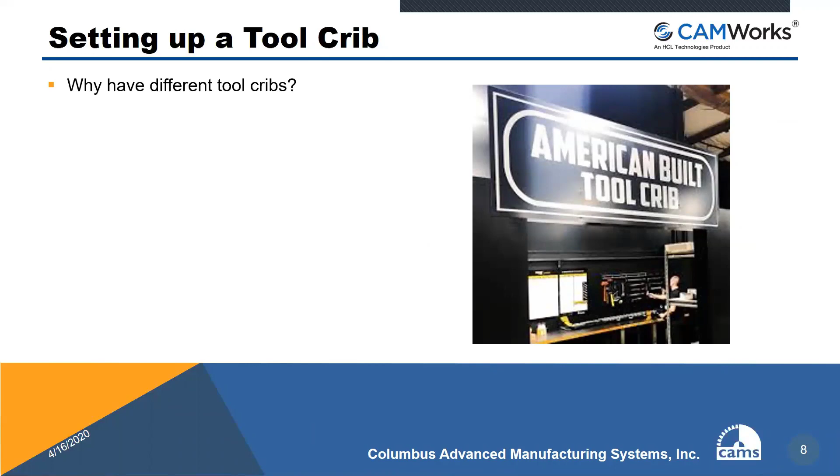So, all right, first things first, setting up a tool crib. This is important. Why would I want a different tool crib? For instance, different machines and materials. If you machine plastics and tool steel, you're going to use different tools. You don't want to machine tool steel with necessarily the things you would machine plastic with. So setting up different tool cribs for that is important.

I'm going to flip over to the actual technology database right now. So this is the TechDB. There's a few ways you can get here inside of CAMWorks. There's a button right here, Technology Database. And then you can also go to CAMWorks, I've got 3 different versions on my computer, CAMWorks 2020, scroll down, Technology Database Application. Well, we've already got it open just for speed.

I'm going to go over to my tool cribs over here. This is the default TechDB that comes with CAMWorks when you install it. I'm going to go to Tool Crib 2, which has tools in it already. These are going to be kind of your favorite tools, the ones you're always going to use a lot. But let's say I got a new machine. We've got a Hurco back at the shop, so I'm going to create a Hurco tool crib.

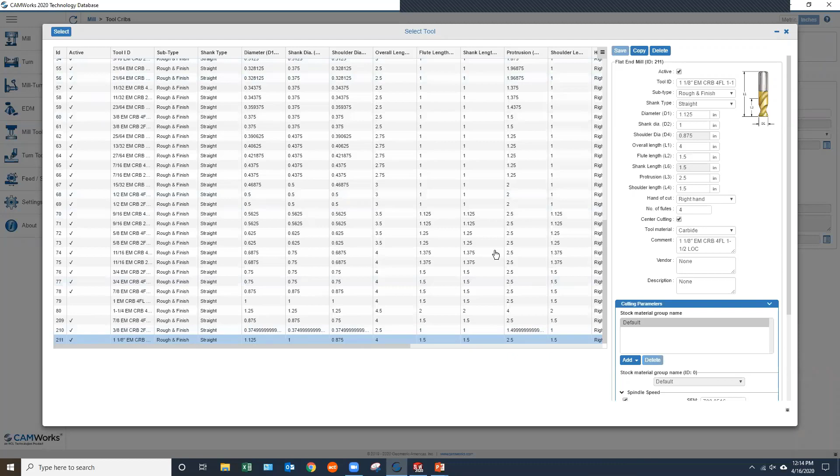And now you'll see on my column over here, I've got 1 and 1/8 end mill carbide. So I'm going to select that. And I'm going to assign a holder for it. I'm looking for 1 inch right there, 1 inch diameter rigid tool. There we go. I'm going to give this station number 2. So I'm going to hit save. So that's how you can create brand new, completely open, totally empty.

Or let's say you don't want to go completely empty, but you want to add to it. Well, I'm going to go back to toolcrib 2, excuse me. And you can also copy a tool crib. So I'm going to copy this. Now I've got a copy of it. And I can edit the name. And I can name this, you know, Larry's CNC. You name it whatever you want. Oh, it doesn't like my apostrophe. My apologies. There. Yeah, so now you can add tools here the same way. Just make sure, the big thing here, make sure you're putting a station number.

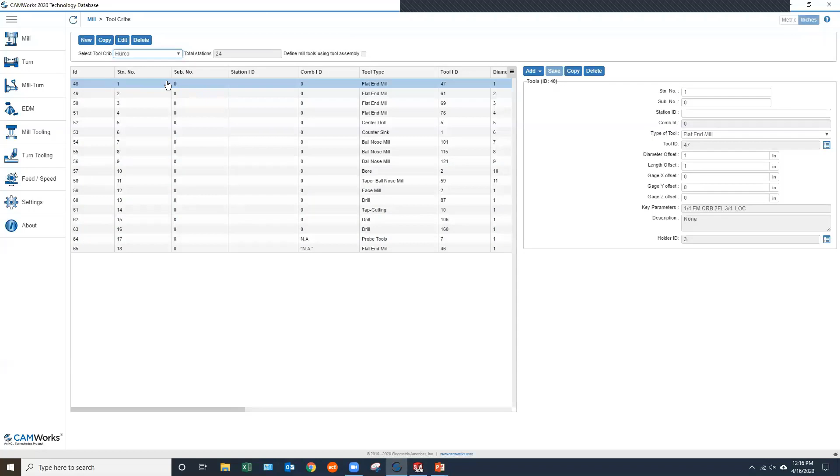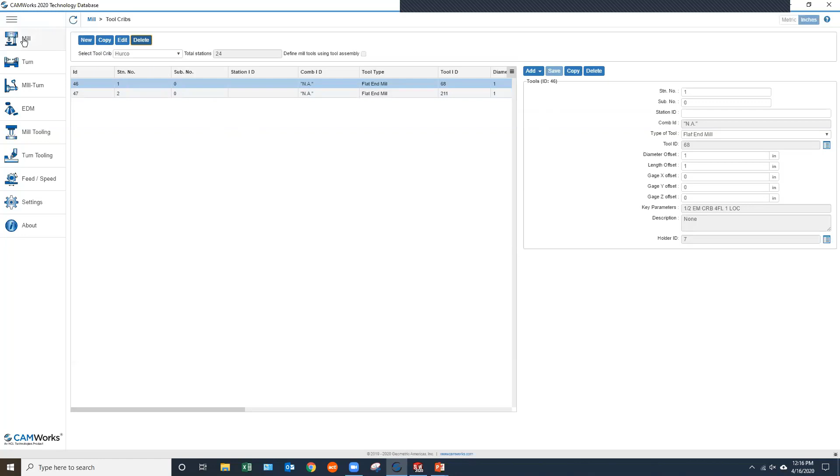And you can also delete tool cribs too. Let's say you get rid of the Hurco. You don't want that tool crib anymore. You can just go up here, delete. Are you sure you want to delete this record? I'm going to click cancel right now because I'm actually going to use this in a little bit. And if I'm finished here, I can get out of this area by just clicking mill up here, or I can click mill over here, and now I'm back to the main screen. Oh, right there. All right, so that's setting up a tool crib, pretty straightforward.

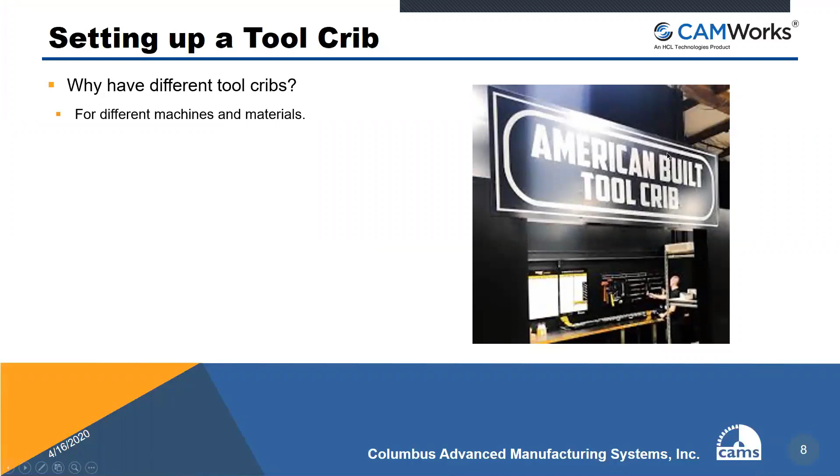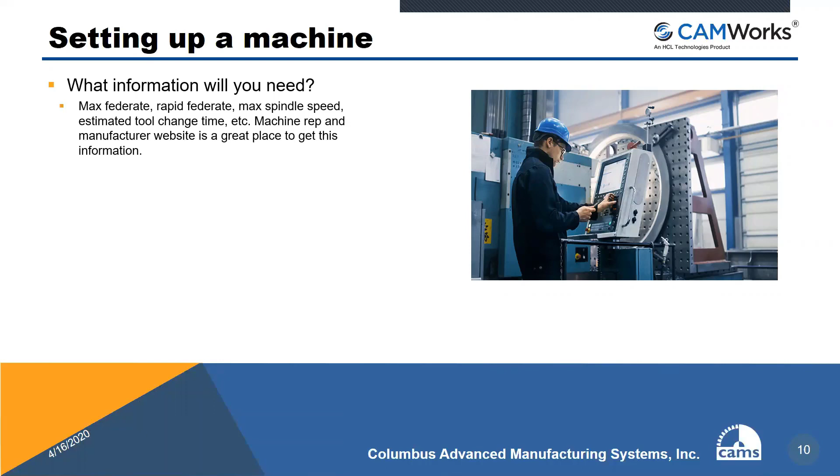Now we're going to set up a machine. What information will you need when you set your machine up? You're going to want max feed rate, rapid feed rate, max spindle speed, estimated tool change time, some more information. Those are the main big four for estimating time for machining. Your machine rep and the manufacturer website are a great place to get this information for your machine.

Setting up a machine as a default, I'll show you how to do that. We're also going to explain how to prioritize toolcrib tools only. So it's going to look in your toolcrib and try to program first with those tools. And if it can't, then it's going to go to the main tool library, which is in the TechDB, and it's going to pull those tools in.

But let's say you only want to use toolcrib tools. You've got some machine with 7 tools in there, and that's the only thing you're ever going to put on there. This is how you would do that. There's an option to set that up in a machine. So let's flip back to the TechDB.

I'm going to go over here to my machines column, and I've got the defaults that are coming in here. So I'm going to select mill inch, and I'm going to create a machine. In order to create a machine, this is where you copy it. So I'm going to copy this mill inch. The reason it has you copy is because there's a lot of information in here, and if you miss something, it can create issues down the line.

So it's important. I'm going to name this Hurco CNC mill. And description, this is my 3-axis. Post processor right now is set to the tutorial ones that come with CAMWorks. I have a lot of posts on my computer because I have some customer posts. I'm going to pick this Hurco, which is a 5-axis, but it'll do 3-axis also.

Machine duty here, this is a big one for feeds and speeds. Depending on the duty, it might change the feeds and speeds that get brought in. You have the option here for horsepower. You've got average indexing time, so if you have 4 or 5 axes, the amount of time it takes to get into a new position. If you had 4 or 5 axis indexing, this is where you would set that 4th or 5th axis.

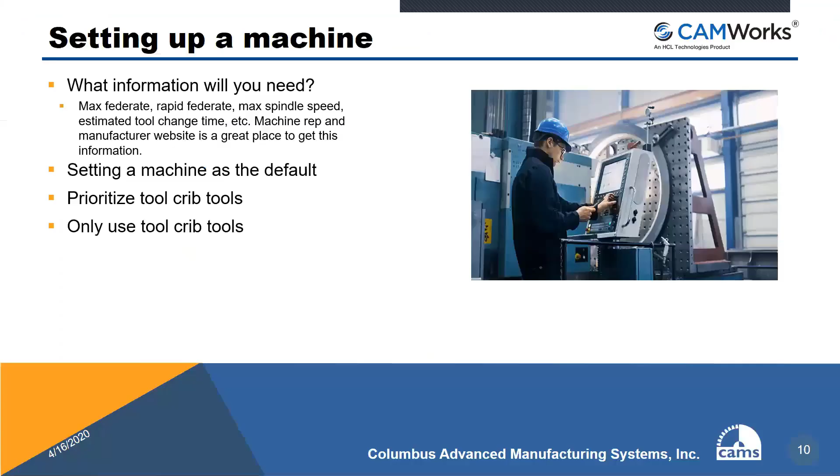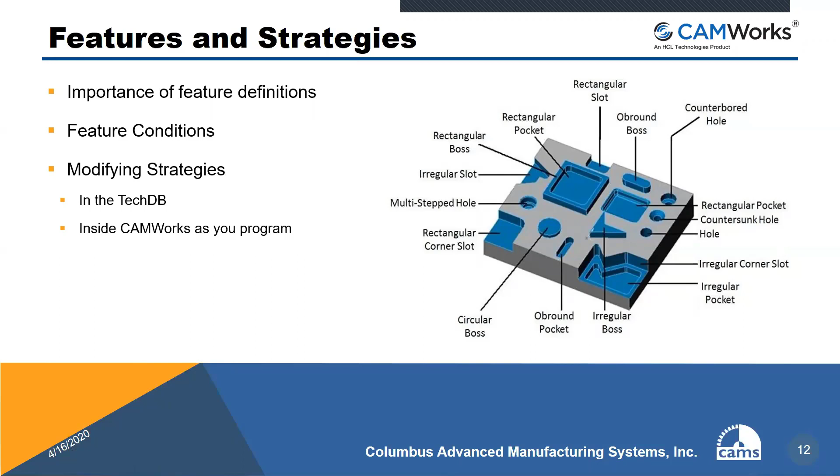So here we'll go over feature conditions, the different settings that you can create. And then I'll show you how to modify strategies. There's 2 ways you can do this: in the TechDB, which we were in before, and inside CAMWorks as you program, where I talked about earlier, where you can teach it how you want to program. So I'm going to show you how to do that. And then creating strategies, again in the TechDB and inside CAMWorks as you program. So I'm going to flip over to CAMWorks.

And I've got a part here, just a simple rectangle with a pocket in it. When I created this, my feature is just rectangular pockets. And you can see here in brackets is the strategy. It's a rough finish strategy. And I've already created the operation plans. Actually, I've already created toolpaths too, just for time's sake.

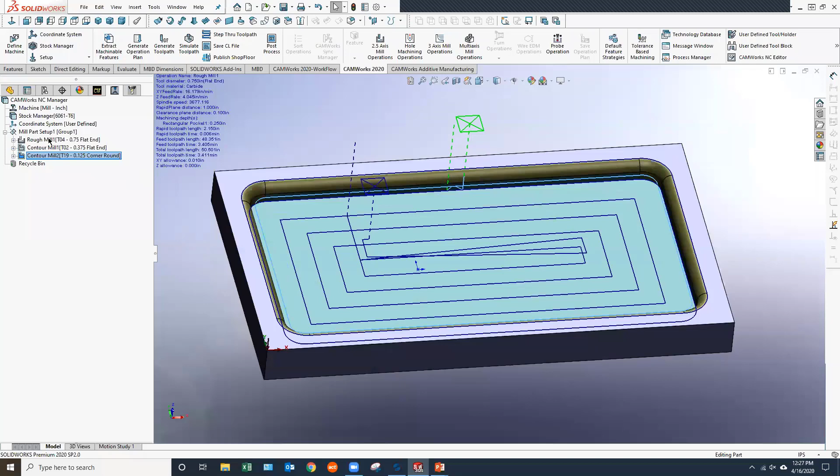So I've got my rough mill, contour mill, and then in the strategy here, this rough finish was just doing a rough mill and a contour mill. Well, I've got this fillet up here, so I added a corner round, an 1/8 inch corner round, to go around there. And I've got a lot of parts that have the same thing, so I want to create a new strategy so I don't have to keep adding a contour mill every time I program. So in order to do that, when I programmed, I just right-clicked, 2.5 axis mill operations, contour mill, and I created this mill, contour mill 2.

And now I'm going to save all of this back into the TechDB. I'm going to go back to the feature tree. I'm going to right-click on rectangular pocket 1. I'm going to go to Save Operation Plan. Now in here you have a couple options. You can create a new feature condition, which I'm going to do, or I could override it.

If, let's say, I don't like the rough finish that it's doing always, and I just want to override it so I'd never have to look at what's already in the TechDB, I don't want it anymore, you could do that too. But I'm going to create a new one.

And down here you got select or new strategy. So here you can select the strategy you wanted if you wanted to override too. You got an option down here where it says new, in brackets. So I'm going to click new. Got new strategy. So I'm going to name this rough finish and corner round. And you also have an option to set this as a default strategy. So there are even default strategies inside CAMWorks. But I don't want that set as a default. I still want the rough finish to be the default. So I've got that. I'm going to hit my green check mark.

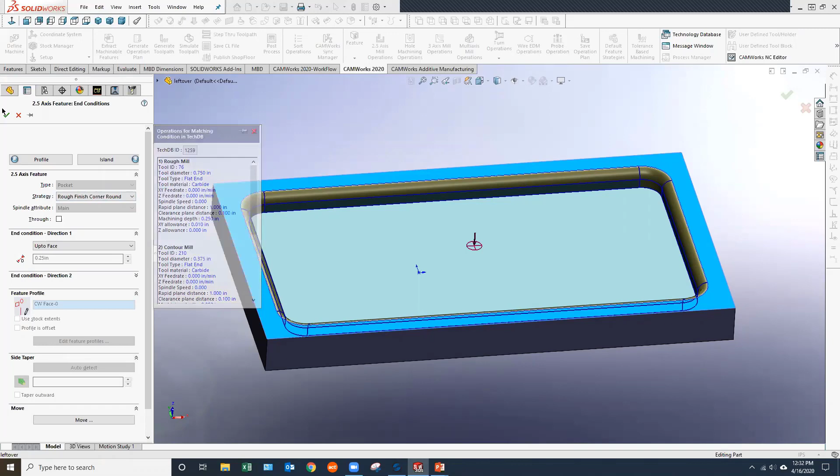Looks great. I'm going to generate operation plans for that. You can see it brought all those in already. My rough mill, contour mill 2. Generate toolpath. I'm going to simulate this bad boy. We'll slow it down a little bit.

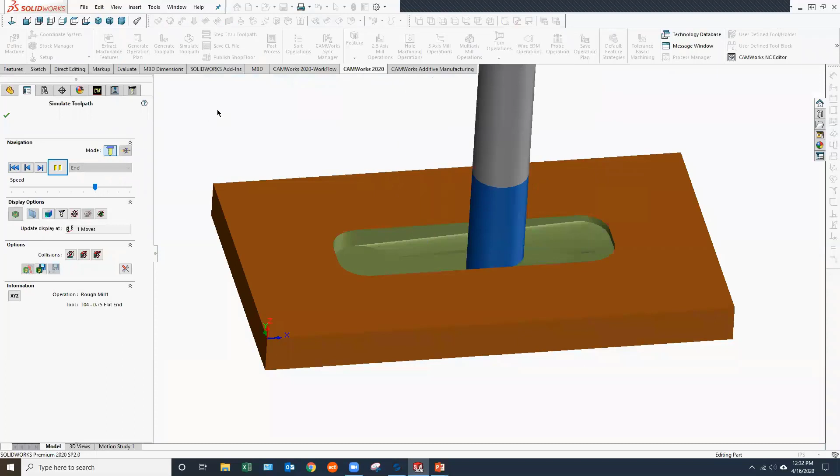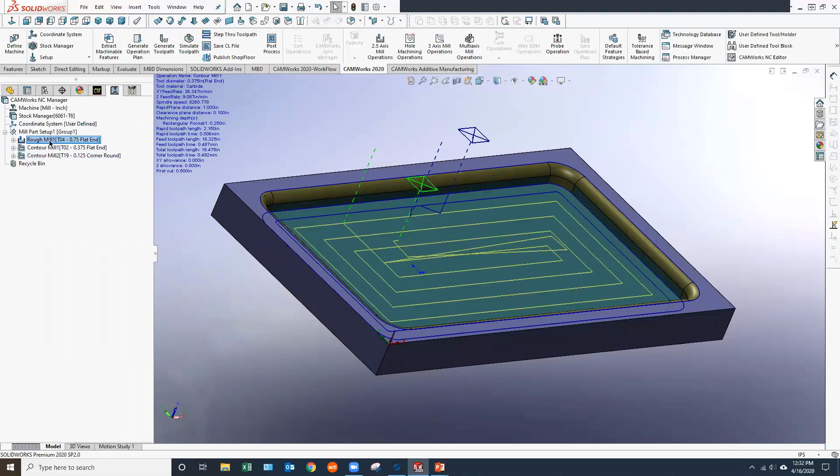Now let's do my rough mill, contour mill, and my corner round. So there we go. So now we've created these strategies. Now let's say you're inside a rough mill and you're like, well, actually, I'm going to look at the strategy itself. I want to see what it is.

So I'm going to double click on rough mill 1. I'm going to go to optimize. And here under TechDB, you've got a button. It tells you the number, 1259. So I'm going to click on 1259. And this brings me straight to the rough finish corner round feature in the operations area. So here you can see the feature conditions. I've only got one feature condition right now for this strategy type.

Also, just to back up a hair, you've got a drop down here for features, all the features that CAMWorks has. So you've got a hole, countersunk, all these things here. And each one has multiple feature strategies that you can use. So this one I've got, rough finish corner round. My feature condition, I've only got one right now.

So the feature conditions over here, I've got a blind. I can also set it to through. If it was a through, it would be set to that. A base attribute, if there was a bottom radius, I could set that, and it would look at the bottom radius, and actually it could pick the correct tool to bring in. Stock material, right now, when I created it, I had my stock type set to aluminum. Well, I want to set this to everything. I want to use a strategy for everything.

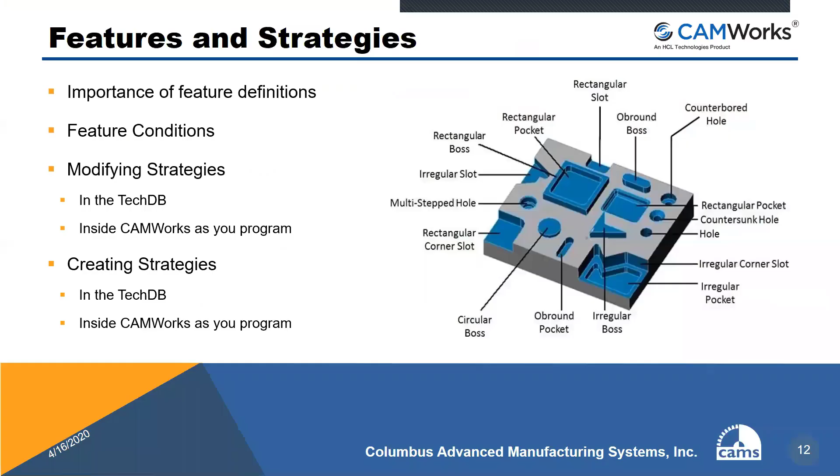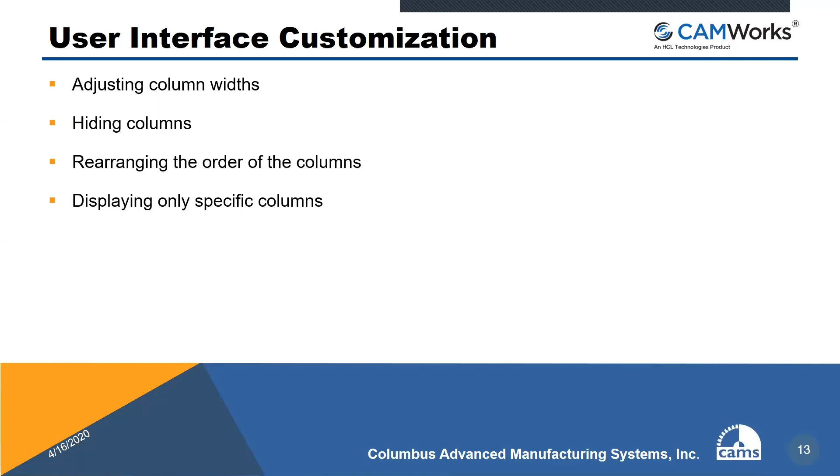And then user customization, which I just talked about. Adjusting column widths, a little review of what we just talked about. You can hide columns, rearrange the order of the columns, or flip them around. Display only specific columns, which you can actually filter through there. This is also really useful when you're searching for tools.

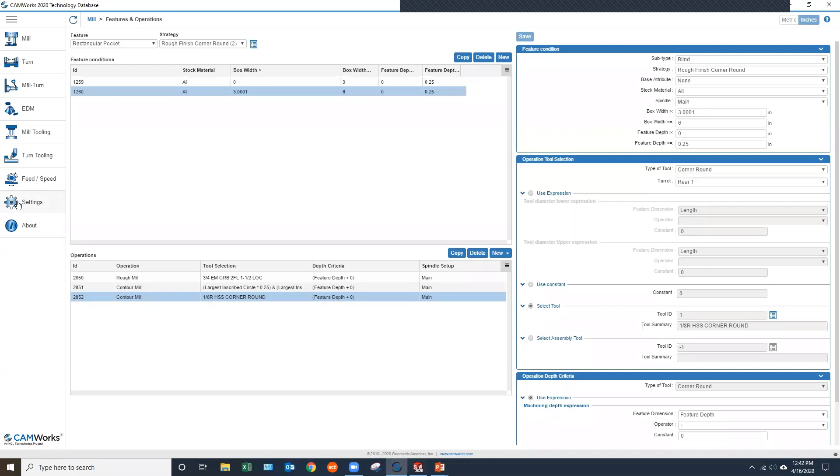New to this one is saving custom TechDB user interface settings. Let me go back to the TechDB. When it says user interface settings, that's like these column widths, things I have displayed. I can go to the settings tab here, and it's got customization settings. This functionality allows you to save and restore customization settings for TechDB app grid, column visibility, and order location.

So I can save my settings. I'm going to save it on the desktop here. TechDB grid options, and you notice it's got a special .cwjs extension. So I'm going to click save here, and you can name this whatever you want. So there, I just saved my settings successfully.

So if I got a new machine or a new computer, I could just load those right up, and boom, I'm ready to go. Now, again, this is different than linking to the database or importing the database. These are just settings for the user interface. The import database and link database, that's for strategies and feature conditions and stuff like that.

Let's go back. And exporting TechDB as a .csv file. That's coming soon. Right now it's slated to be CAMWorks 2020 Service Pack 2 or 3. It's in development yet, they're still working on it. A .csv file stands for comma-separated values, which is basically a simplified version of an Excel file.

Really powerful there to be able to export that and just put it in a spreadsheet where you can see all your feature conditions, your strategies. It'll be really, really useful once it comes out. Hopefully in Service Pack 2, but no later than Service Pack 3 from what we've been told by them.

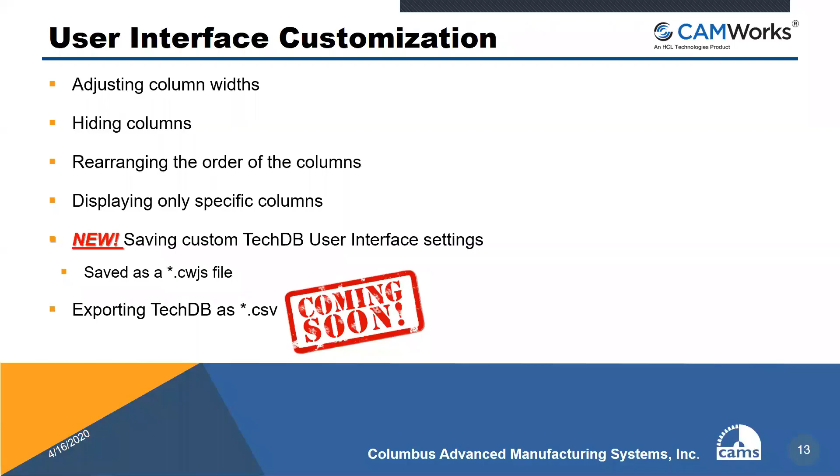Then importing and linking to an existing TechDB. So do I need to import a TechDB, and why would I like to link to a TechDB? Do I need to import a TechDB? Not necessarily, but every time a CAMWorks installation is upgraded to a newer version, the data structures associated with the TechDB undergo upgrades. So if you have customized data within the technology database associated with your existing CAMWorks installation, it's imperative you

number one, always back up your data. First and foremost, always back up your data. And then you can import the customized TechDB, and this will bring everything forward, and you'll have some of the new features involved. But the biggest thing is, if you have strategies already created that you've put a lot of time in, and want to bring your machines forward, importing a TechDB can be really, really useful.

And why would I like to link to a TechDB? So multiple users can link to the same database, leveraging the strategies and feature conditions the user has created specific to their individual shop. This is standardizing programming. You can put a linked database on a shared file server, and everybody can look at it. You're all using the same technology database, so it creates a uniform thing.

We all know if you've got 5 programmers, each one can program completely differently. And you might have one guy who's always a little bit off. Well, this can help standardize some of that programming, so the guys running the machine are seeing consistency throughout. Instead of having to train a guy over and over again, you train your TechDB on how you want to program.

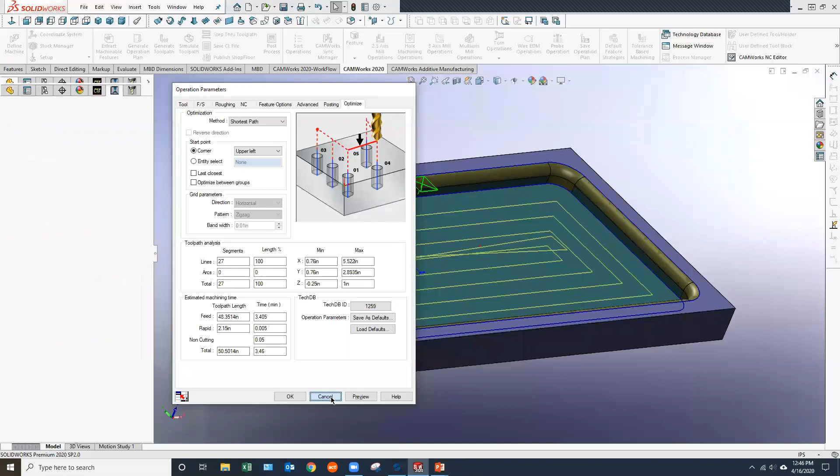So let's switch over to the technology database. Number one, when you do this, close down CAMWorks. So I'm going to hit save, and close this down so we don't interfere with anything. If you link to a database, it has to be the same version year. I'm in 2020, and I think the only TechDB I have is the default one. But it's the same thing.

If I had another one on a shared file server, I could hit browse. I don't have my network up since I didn't want to set my VPN up for this. But I could go to a networked drive, find a training TechDB, and link to that. Find the same version year and just hit OK.

And then importing a TechDB. This is if you're going from a different version year, like from 2019 to 2020. You would browse to it. I'm going to go to CAMWorks Data 2019 TechDB. Oh, I'm going to go to the original TechDB. Click on this one and hit OK. It's going to ask me what data I want to import and whether to create a backup copy. I'm going to uncheck that, and hit import.